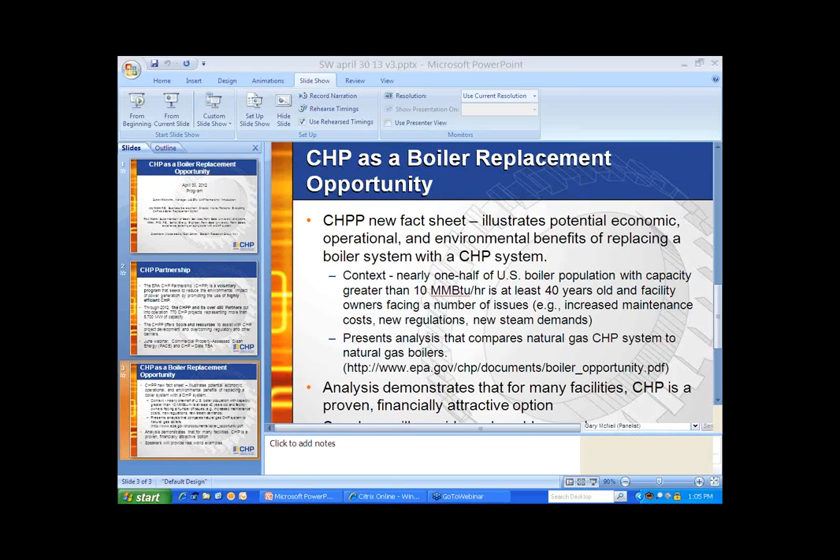Hello everyone, and welcome to the CHP Partnership webinar on CHP as a boiler replacement opportunity. It's my pleasure to welcome you today, and we have a number of really expert speakers that will share their experiences with you, and hopefully you'll have a lot of questions for them, and so we'll use that time at the end to cover that.

So let me just do a brief round of introductions. Our first speaker will be Jay Weist, who's a professional engineer and business development director at Worley-Parsons, and he will bring the project development perspective. And then we have some facility operators joining us from Penn State University, Paul Moser, Superintendent of Steam Services, and Laura Miller, who's Senior Energy Engineer. They'll be sharing their experiences with two systems, one that's been put in and one that's in the works. And then we'll have a question and answer session moderated by Bob Seidner.

So first, a couple words of introduction. I think a lot of you are probably already familiar with the EPA CHP Partnership, but perhaps you're not as familiar with what we're doing lately. We are a voluntary program that focuses on promoting CHP as a highly efficient way to reduce the environmental impact of power generation. We have a lot of tools and resources to assist with project development, and we also target barriers, regulatory barriers, financial barriers, that sort of thing. Through the over 12 years of the program, we have 770 projects that we've helped. We have over 450 partners and quite a few megawatts of capacity that we have facilitated.

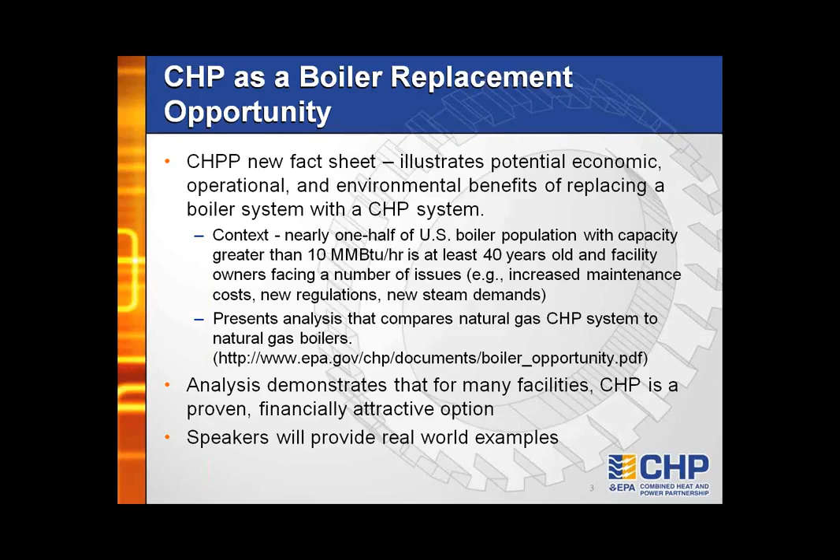Okay, thank you, Susan. This is Jay Weist at Worley-Parsons. As we go through the slides today, what I have laid out here as requested is an approach to evaluating CHP as a boiler replacement option, most likely from a project developer perspective and looking at the options. And then from there, we'll close out, and I have a case study or two that we could get through and show you a real-life example of what the opportunity is and how to evaluate this. If you could go to the next slide, Sarah.

First of all, Worley-Parsons, we are a project delivery organization for execution of projects, helping our clients develop projects and then deliver them from concept through completion. As you can see, we are a global company of about 40,000 people located around the world and operating primarily in the power, hydrocarbons, mining, metals, infrastructure, environment, and minerals and chemical sectors. Next slide, please.

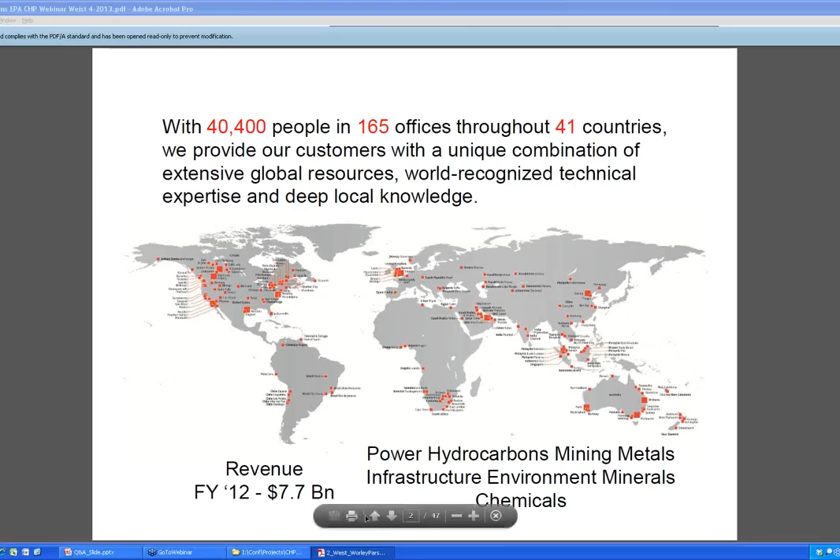A key consideration as you approach the CHP project and looking at any type of project delivery is to look at the concept all the way through to completion. And really, as far as what we see at WorleyParsons as a project delivery approach, is taking that blank sheet of paper, looking at what your options are, and then from a feasibility select consulting perspective, take the next

step, transition through a staged, gated process where you develop the project in both scope, concept, and details, along with the budget needs as far as determining capital and O&M operating budgets and developing pro formas for a bankable feasibility study and then actually building the facility and then operating and maintaining it. That project moves along a development cycle, as we call it here, project delivery and project development cycle, going from a consulting phase to a detailed engineering phase and through an own and operate phase and maintaining the facility.

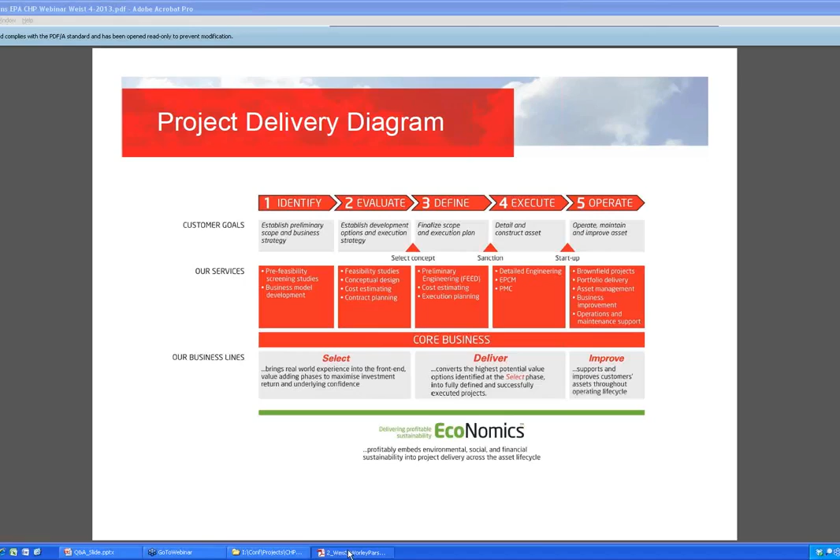And that's really the approach we take as we step through the process here for looking at, okay, if I wanted to consider what CHP options I had for my facility and what are my alternatives, when I'm looking at what was presented here from Susan as far as consideration of options when you're saying, okay, I have an existing facility, might be affected by Boiler MACT, and what are my options going forward. So as we go through this, keep that in mind. And if you go to the next slide, please, Sarah.

Why CHP, which is the question that you propose to yourself, and go to the next slide. And really what the value is here, and I know we're talking about boiler and gas-fired boiler options, but if you're looking at Boiler MACT, certainly the value proposition is, okay, do I want to continue at this point investing in my coal-fired plant operations and looking at retrofit air quality control to meet the Boiler MACT requirements, and the things associated with that is maybe higher O&M costs over existing operations, increased maintenance for existing equipment.

There's really no return on invested capital, risk of escalating coal costs, and you're still exposed to future regulations which might be incurred for continuing coal burning. An alternative to that is to look at, okay, what is my gas-fired CHP option? For one, you're going to have lower O&M costs, leverage CHP for producing electricity and supplementing plant load or sell excess power. You have a current market where natural gas pricing, at least in the near-term horizon, seems somewhat stable. And then you have a possible higher return on investment and lower O&M costs through external electricity sales and improved plant profitability. Go to the next slide.

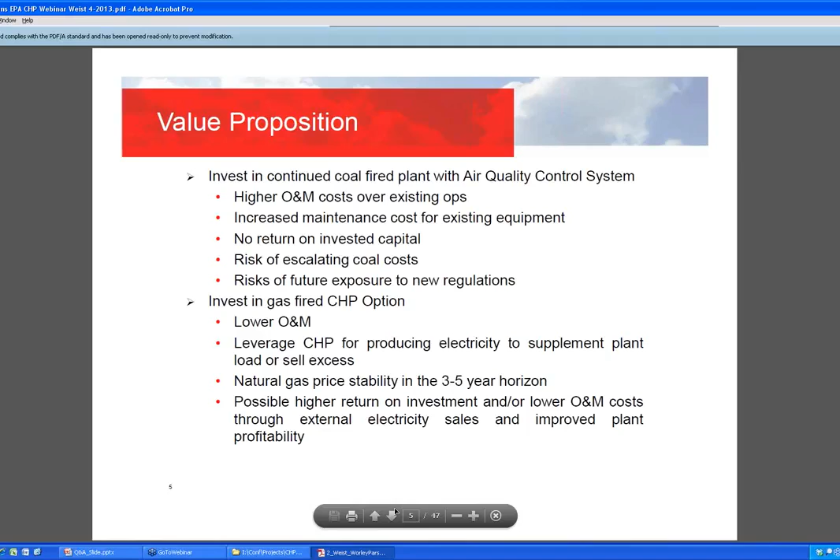And as you get into this, and these are developing issues that are just gaining traction in the industry, there are other things to consider, and they're well covered in the CHP as Boiler Replacement Opportunity fact sheet that was just issued by the EPA. These are things that you have to consider as additional value, as far as risk mitigation techniques and planning for future operation, where you look at your ongoing existing operations, and it might align with current corporate sustainability compliance implementation plans by looking at CHP versus existing coal, or even gas-fired package boilers. Are there site expansion needs for increasing steam demands?

You have economic and operational benefits in consideration of this, where certainly an issue that is gaining traction is enabling system resiliency in energy infrastructure, and this is really considering island mode operations. It's gained a lot of notoriety with some of the recent weather events in the Northeast, either snow or hurricanes, where there's been extended outages from the regions, and maintaining continued operations and, for industrials, avoiding shutdown startup costs for unplanned outages.

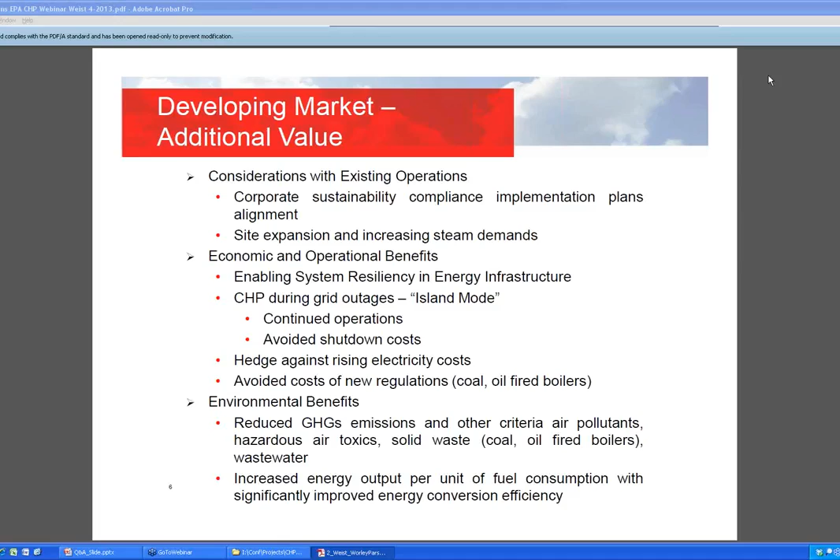And as you get into those facilities which are institutional types with hospitals or nursing care or universities where there might be more critical benefits as critical infrastructure, there are those too that provide island mode operation during those long-term extended outages. Other operational and economic benefits are hedging against rising electricity costs, and we'll get into a little bit of why that is occurring. Avoiding costs of new regulations, again, where you might have increased regulations for coal and oil-fired boilers,

and then the environmental benefits, which is reduced greenhouse gas emissions and other criteria air pollutants, hazardous air toxics, solid waste associated with firing coal and oil where you have air quality equipment and normal waste streams, and even as recently as wastewater issues that might be coming up associated with coal burning. And then the other environmental benefit is just the increased efficiency, converting energy into thermal and power and doing it very efficiently through a CHP process. Next slide.

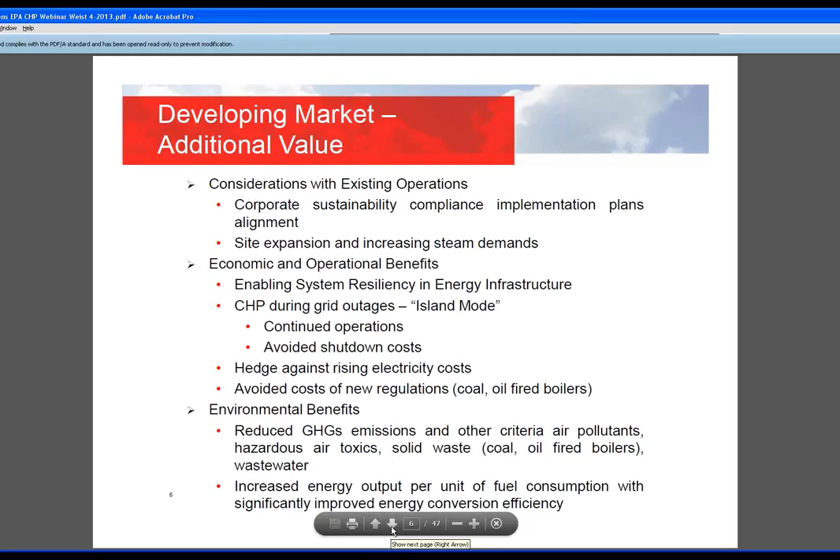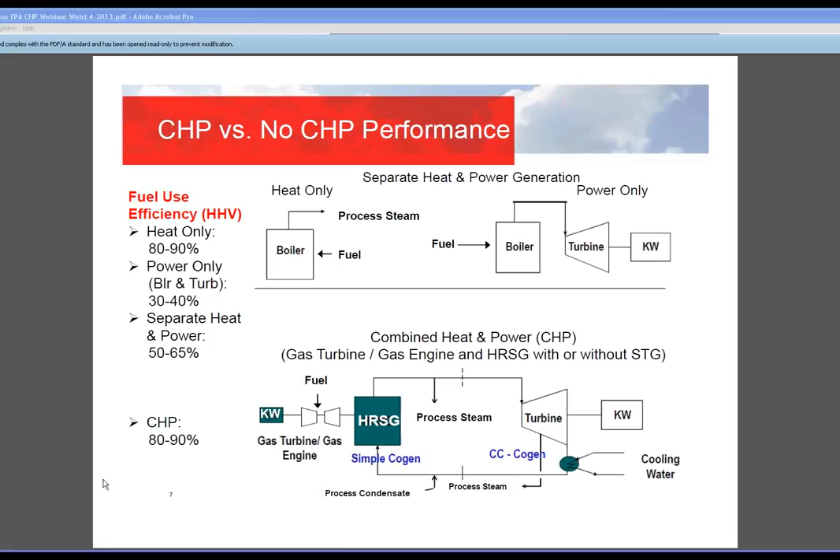And the way we've approached this is to say, okay, if you're going to do a quick screening analysis approach, if I want to understand what all my options are and be able to quickly assess and screen them down from multiple options, if it's 4, 5, 10, 15, 20, and get it down to 2 or 3 which are viable, this is an approach that you can actually take.

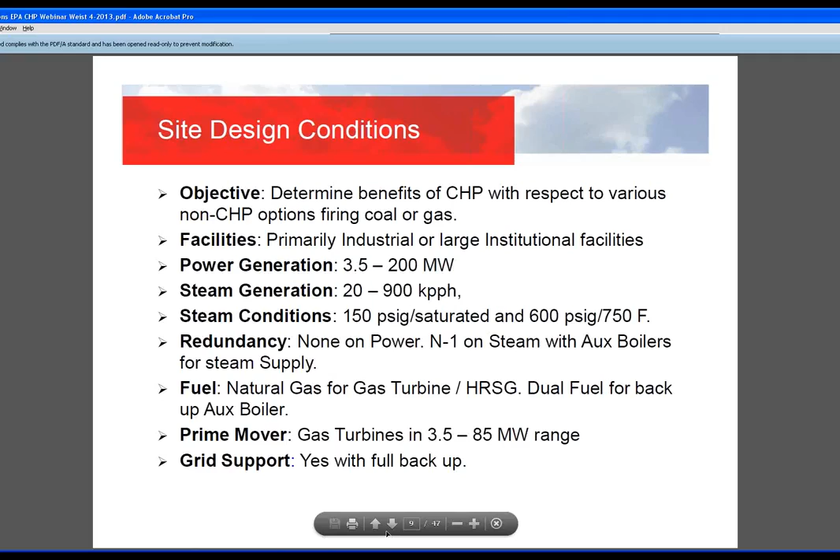And then looking at redundancy, as far as steam backup with aux boilers, and then for power, assuming that the power supply could be backed up from the grid. Looking at fuel supply, natural gas being available for gas turbines and the heat recovery steam generator, and for reliable supply, in case there would be a loss of gas, you could have an aux boiler dual fuel fired, oil and gas. Then the prime mover selection, and using grid backup. Next slide.

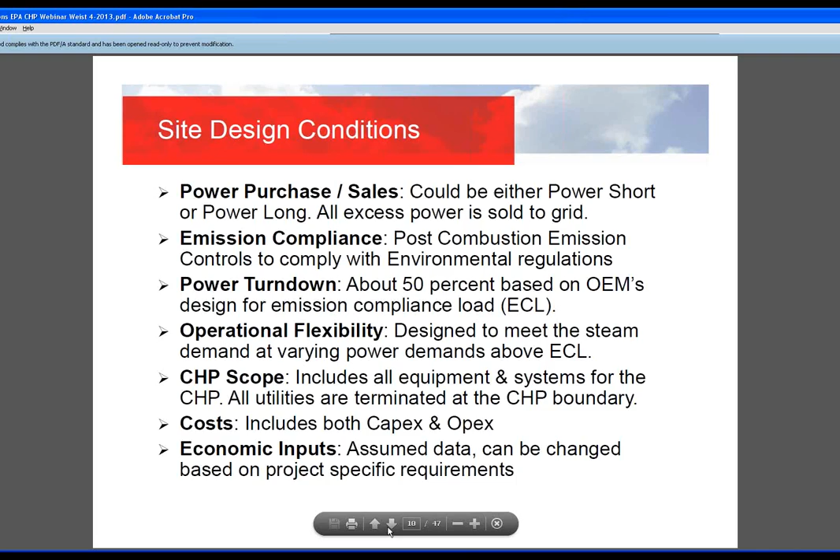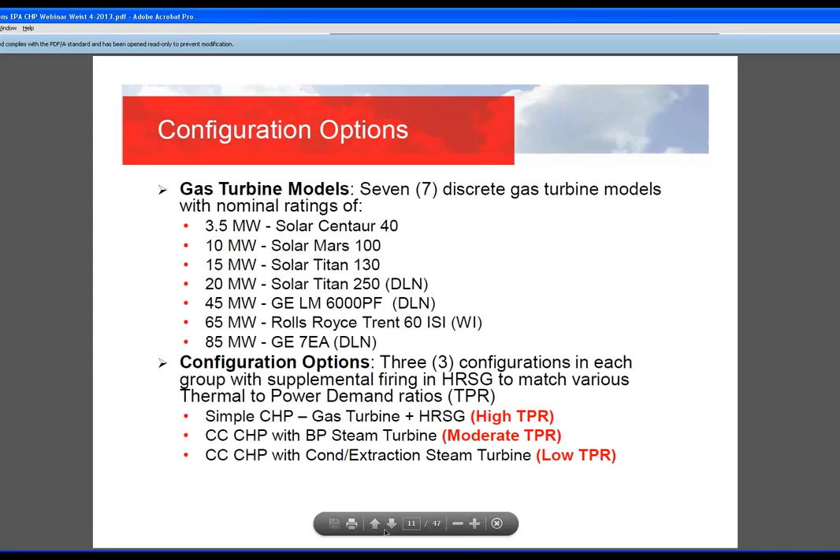If you're considering CHP and you have a high thermal to power ratio, you want to look at simple CHP with a gas turbine and HRSG. You have a combined cycle CHP with a back pressure steam turbine. And if you are high in power consumption versus your thermal, you always have the combined cycle with the condensing extraction steam turbine option. Next slide.

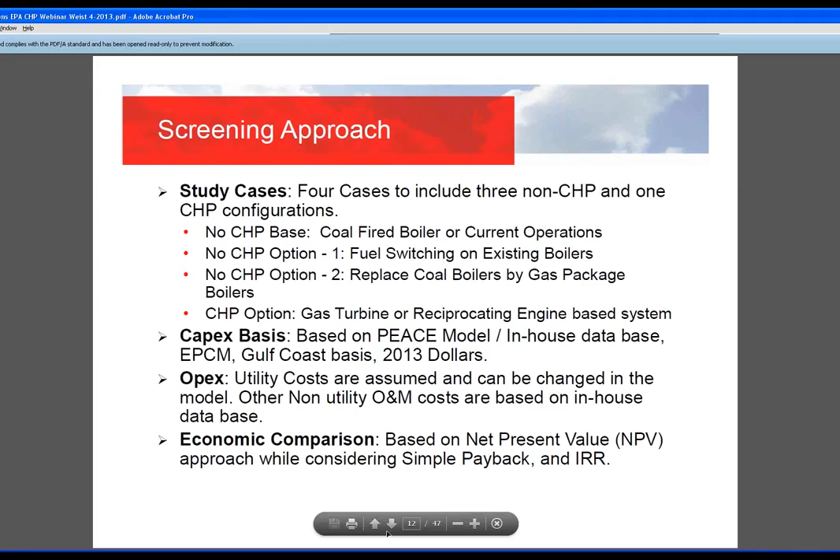So the approach is to look at your current operations and, going forward, what are the costs associated with that. Another option that is considered today is fuel switching, which is gas burners on a coal boiler. A third option is just putting in gas-fired package boilers. And finally, what we consider an envelope of CHP options is using a gas turbine or a reciprocating engine-based system and looking at alternatives. Coming up with capital and operating costs, and then doing a net present value, simple payback, and IRR. Next slide.

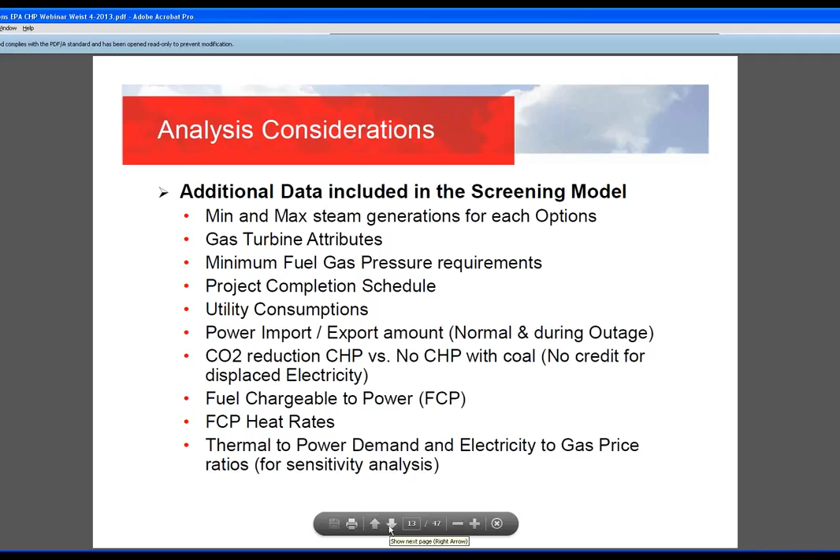Certainly our approach is fuel chargeable to power, which is a traditional CHP evaluation approach on how you value what incremental fuel is needed for heat rate and also for calculation of generating your own electricity. And then finally, thermal to power demand ratio and the electricity price to gas ratios.

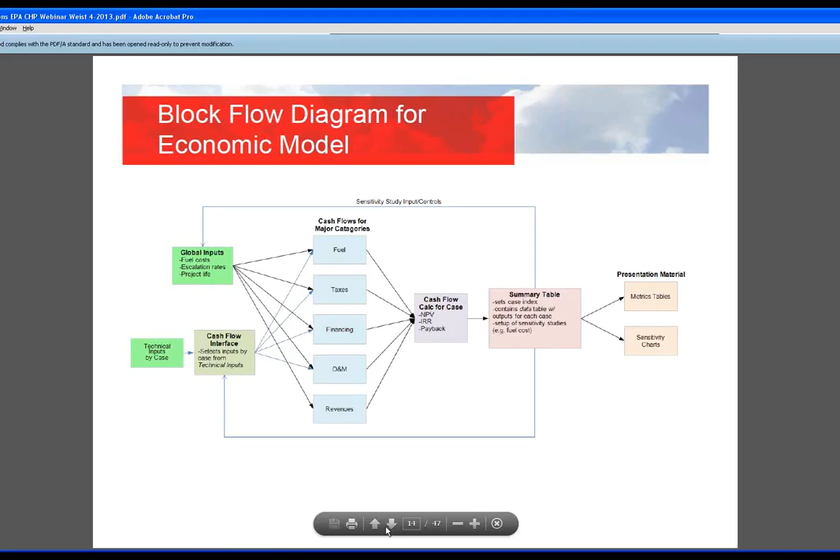And then running it through an economic model. Developing, you have a CapEx, you have a construction schedule, and you run it through an economic cash flow model and continue from there in developing the NPV.

And these are some of the benefits that we've found in general. Every site's going to be unique, but we have generally seen 40 to 60% energy savings. With an FCP heat rate basis, we've looked at systems at heat rates of 3,800 BTUs per kilowatt hour because of the design requirements. The one thing to be straight on is that when you look at the capital budget for a CHP versus package boilers or retrofit air quality, it will be higher, order of magnitude higher in the estimate. But the offsetting benefit is the lower operating and maintenance costs and fuel costs, so you're evaluating that against the higher capital.

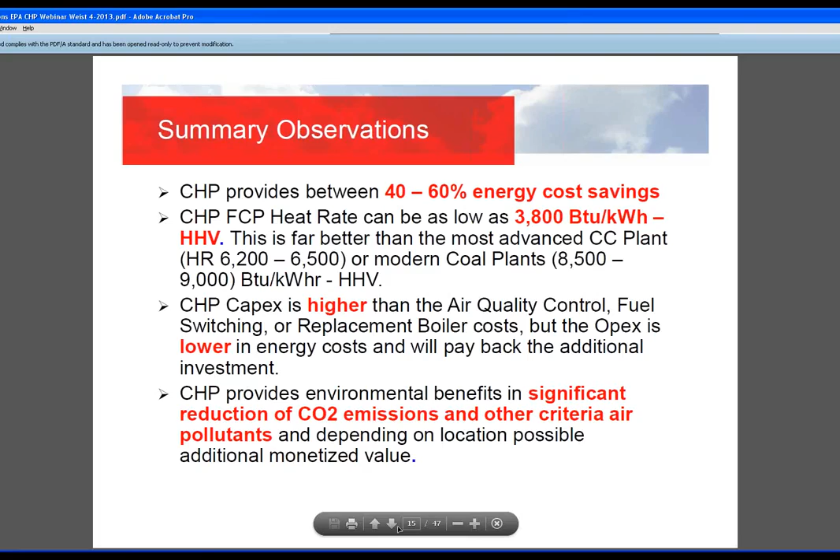Let's go on to the next slide. I just want to run through a quick case study which shows these results.

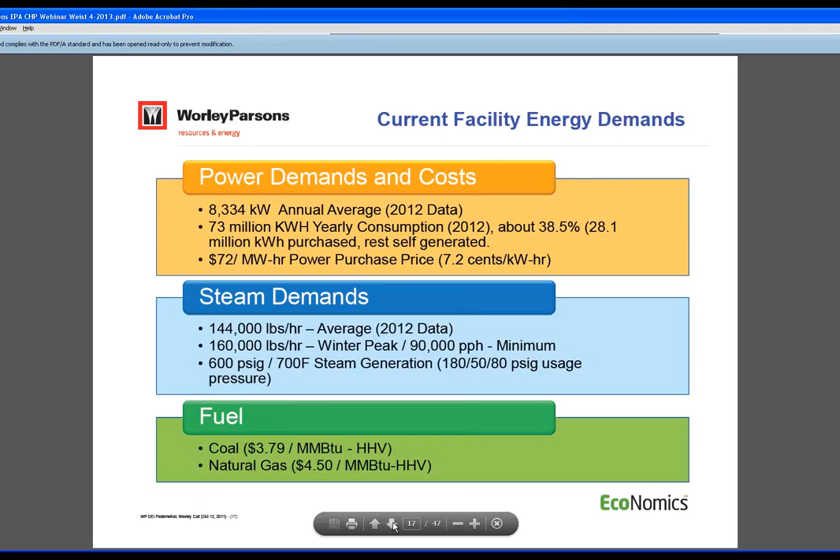This is for an 8 megawatt CHP at a facility, and you can see the requirements here as far as their current power price, the amount of electricity they consume, what their steam demands were -- and I emphasize were -- at 144,000 pounds an hour with their coal-fired plant, and then looking at their coal pricing and natural gas pricing available at $3.79 and $4.50.

Really the options here were a new package boiler with back pressure steam turbine. We evaluated Centaur 50, 70, and 100 as far as the benefits, looking at those producing both the power requirements for the site and thermal requirements.

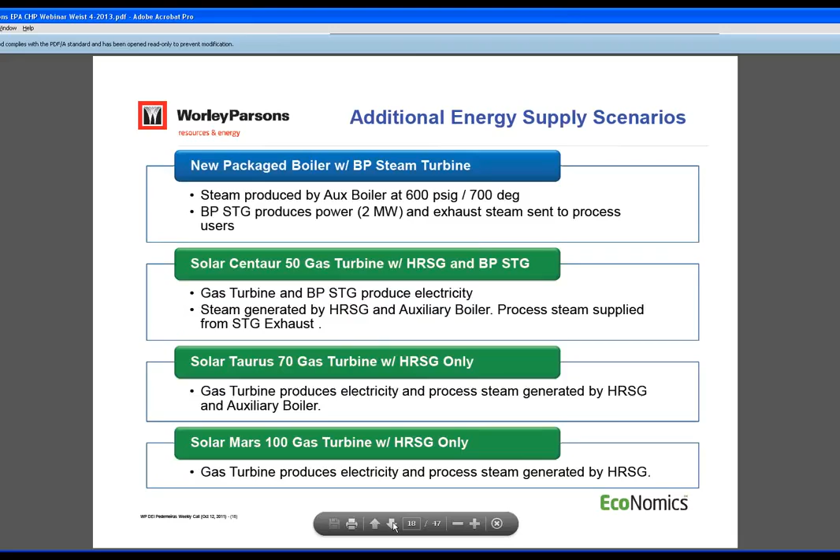Here you can see with both the Centaur 50 and 70, in those scenarios they weren't quite enough to meet the thermal requirements, so you'd have to run an aux boiler in the background. With the Mars 100, they're producing more power than they need, so they'd be exporting power. And then looking at an extreme case, they have the Titan 250, going from there.

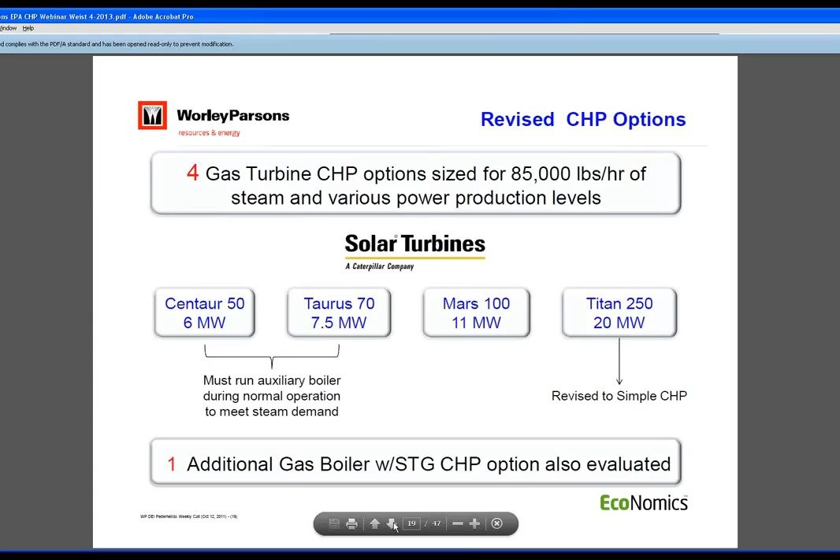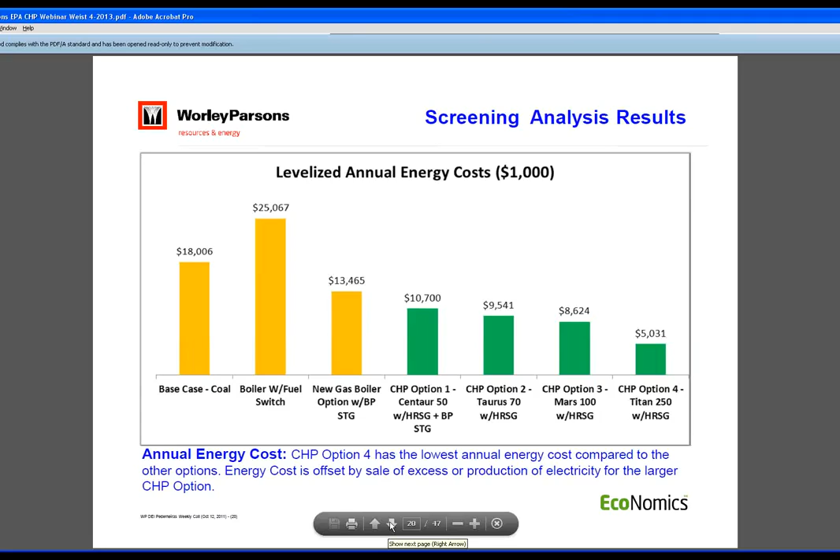This is really the true benefit -- looking at the levelized cost of energy, you can see the annual energy cost and what the savings are for spending the increased level of capital. Going from $25 million for just the fuel switching, which is the annual energy cost, to the highest end, which includes the net benefit from selling power to the grid, of between $5 and $8.5 million.

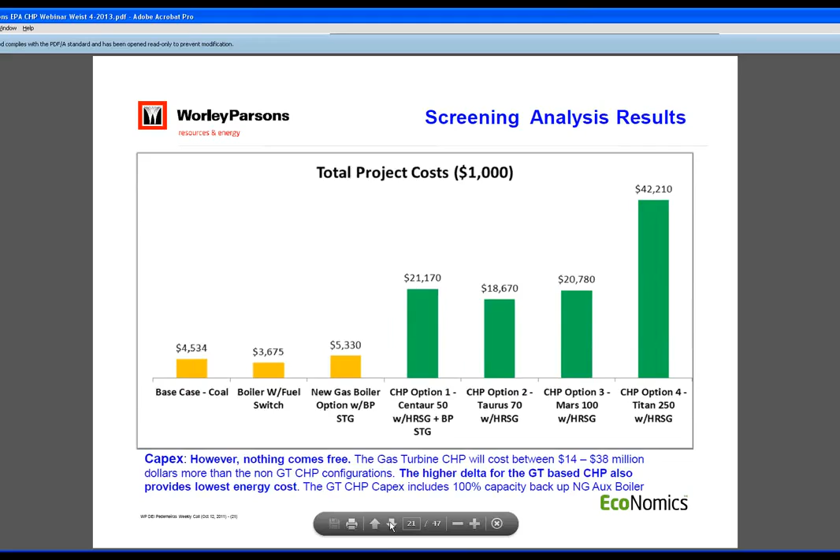Here, this is the total project cost, considering what you have to pay to install these systems. You can see to the left the simple solutions of retrofitting the coal or boiler fuel switching, or just putting in package boilers, against some of the incremental costs of looking at incremental CHP options of putting in the combustion turbines.

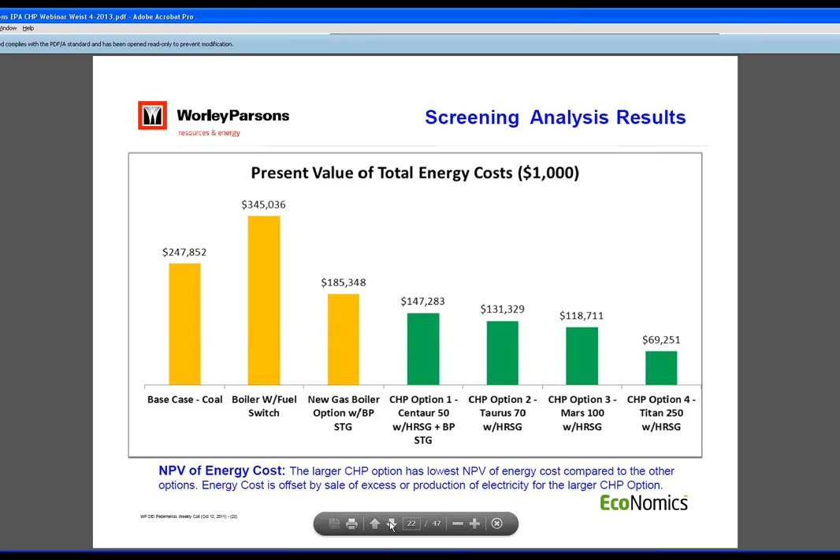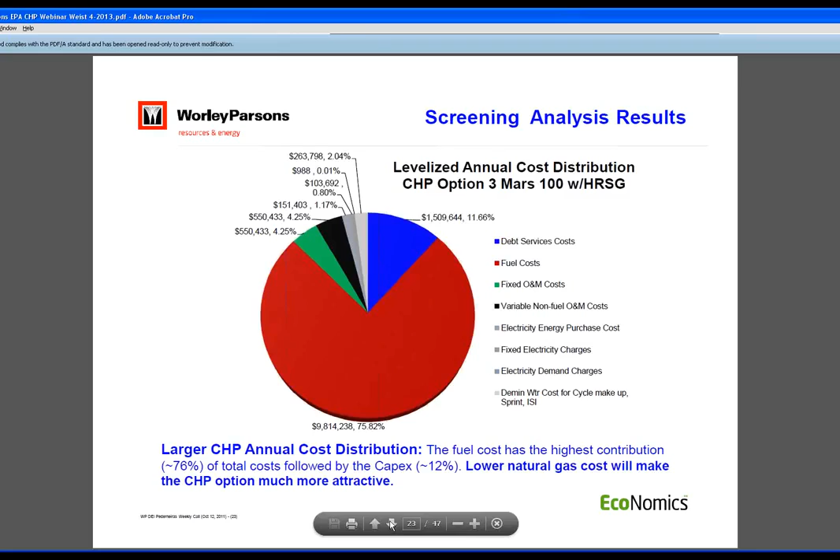This is the breakdown of the annualized costs as you consider debt coverage, energy bill, and all the other operation of the facility.

And this here shows you the incremental CO2 reduction and the benefits that you have from that, as far as increasing your power output and thermal requirements -- the efficiency of conversion is that you're actually saving CO2, not just from your own facility, but also what you're displacing from what's being generated from the local grid connection.

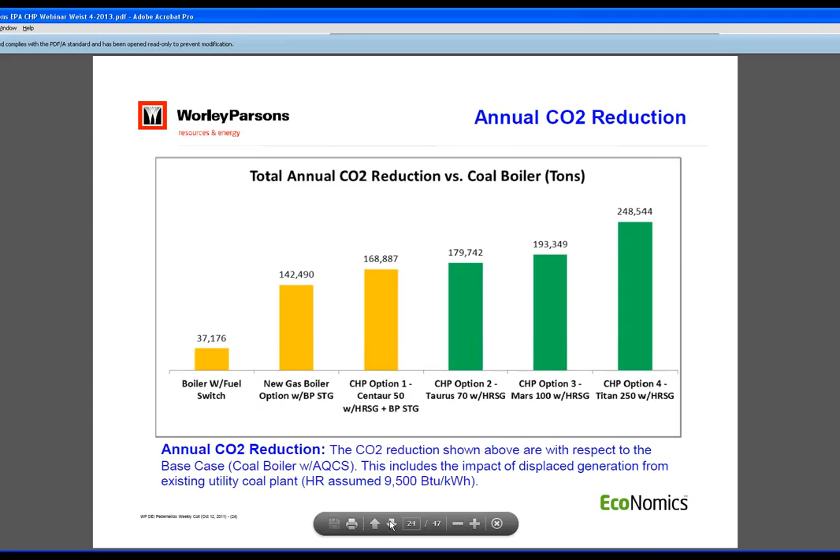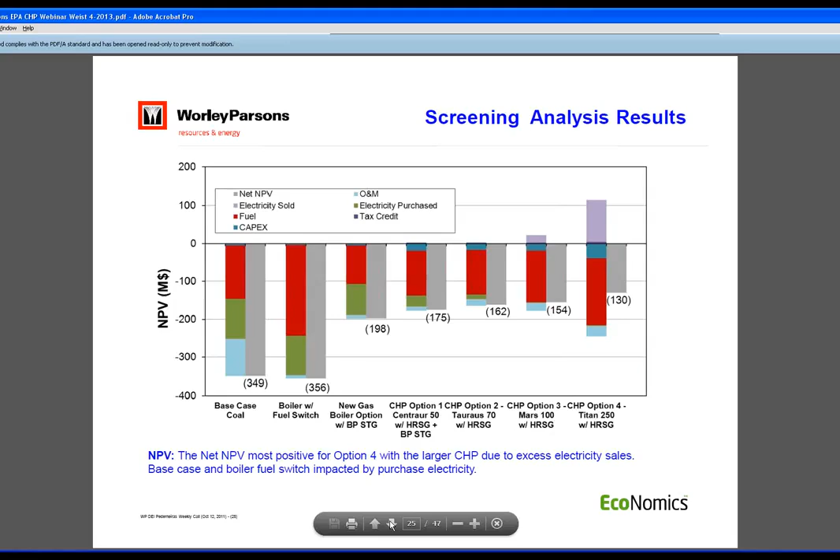This is what you would see in an NPV analysis, looking at the breakdown of what contributes to the net NPV. Above the bar on the left side, that's indicating the revenue benefit from selling the excess electricity to the local grid, giving you a net NPV on the right side of each bar, which might be less than the additional costs.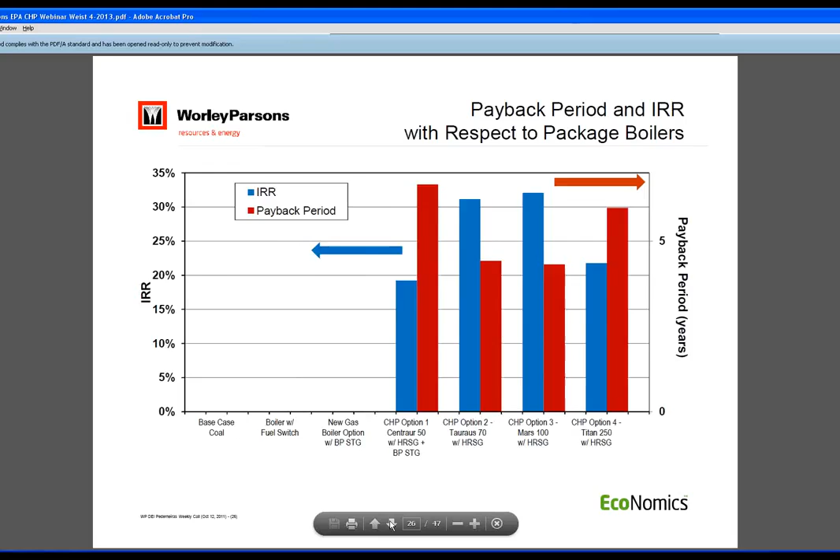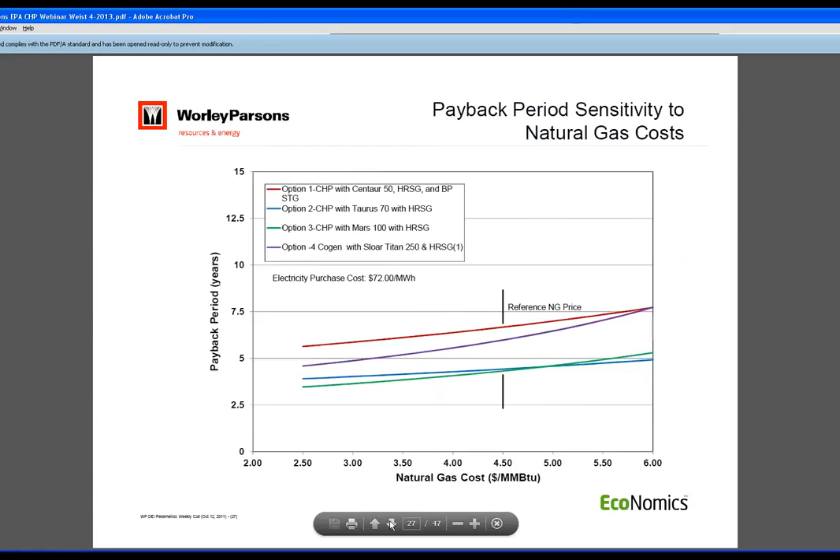Next, some sensitivities for these options: what's the variability of gas pricing, and how does that affect my payback? Next is the sensitivity to the local electricity purchase price and how that affects the payback of the project.

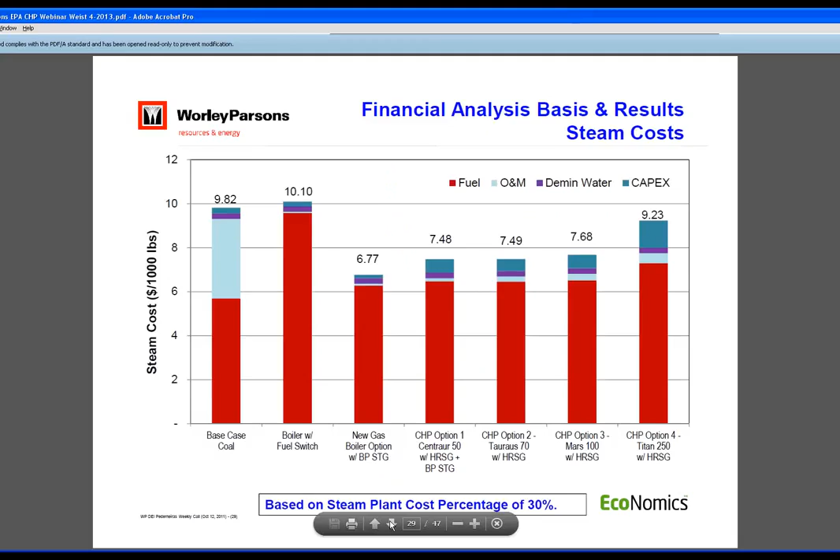Another thing you can calculate as you approach CHP is the cost of steam produced, just allocating the capital and the O&M budget. You can see your steam required as far as the cost per 1,000 pounds.

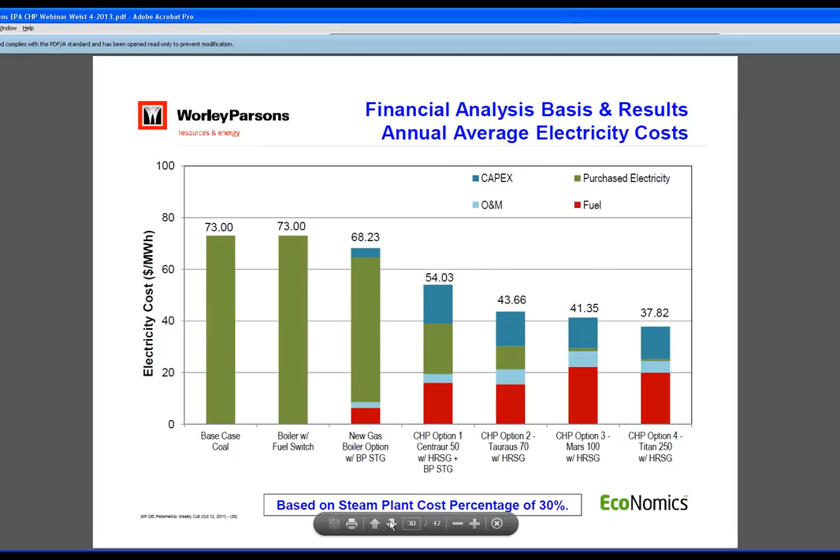If we fix the steam costs at the current cost of steam production, you can see what the normalized cost of electricity production would be, compared to fixing the steam cost versus calculating it.

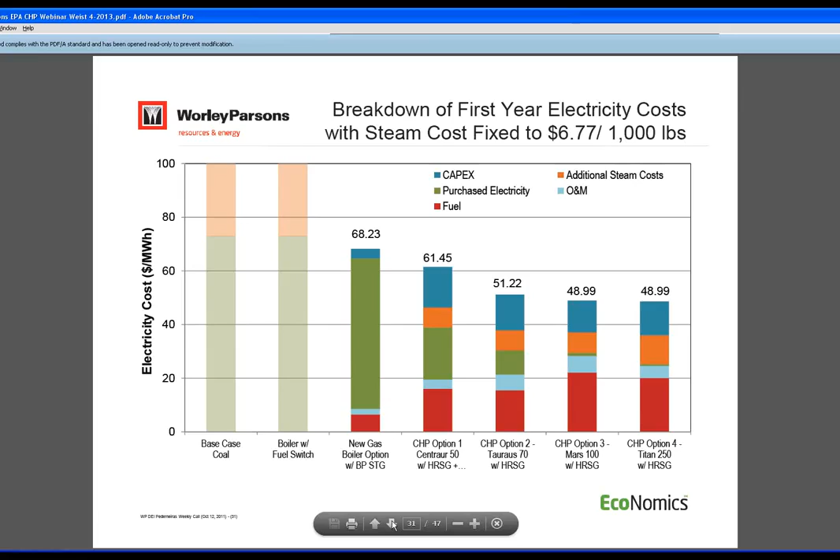So that's the case study. As part of the presentation, I do have a second case study available, but as time is limited today, we'll be moving on to the next presenter, which is Paul Moser and Laura Miller at Penn State.

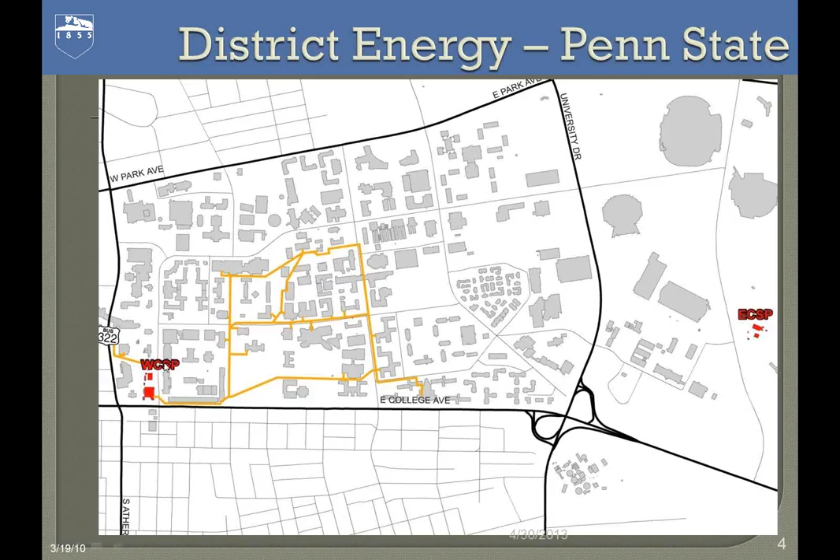West Campus Steam Plant, the coal-fired power plant here at Penn State. We don't use steam for chilling at all on campus, so we don't really have a chilling load in the summer. Here's a picture of where the West Campus Steam Plant is located, right in the middle of State College, at the corner of Burrowes Street and College Avenue. Again, that's a coal-fired power plant.

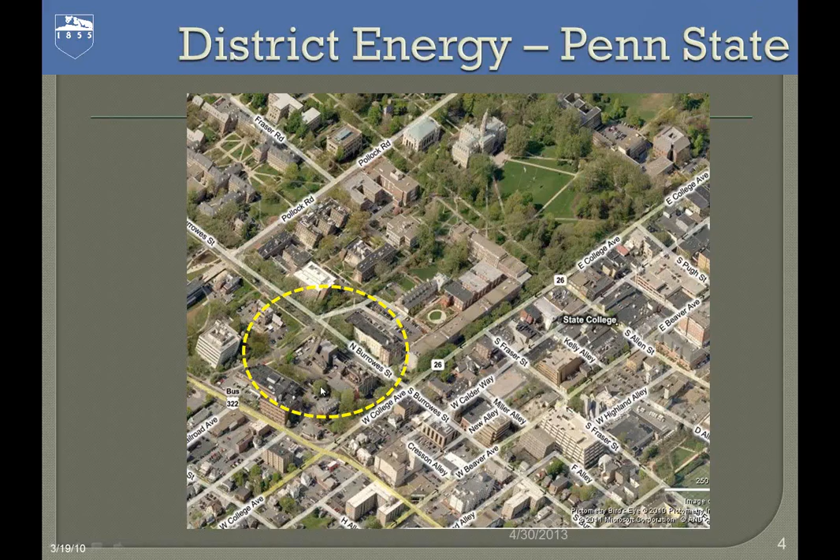And the East Campus Steam Plant, located a little bit further out, you can see it here. It has 2 packaged boilers, 100,000 pounds an hour each. They're natural gas fired with fuel oil number 2 as a backup.

So the energy picture in 2006: we needed additional capacity. Our peak steam demand in the wintertime was approaching our N-1 capacity, so we were seeing increasing steam demands each year. That was a big one.

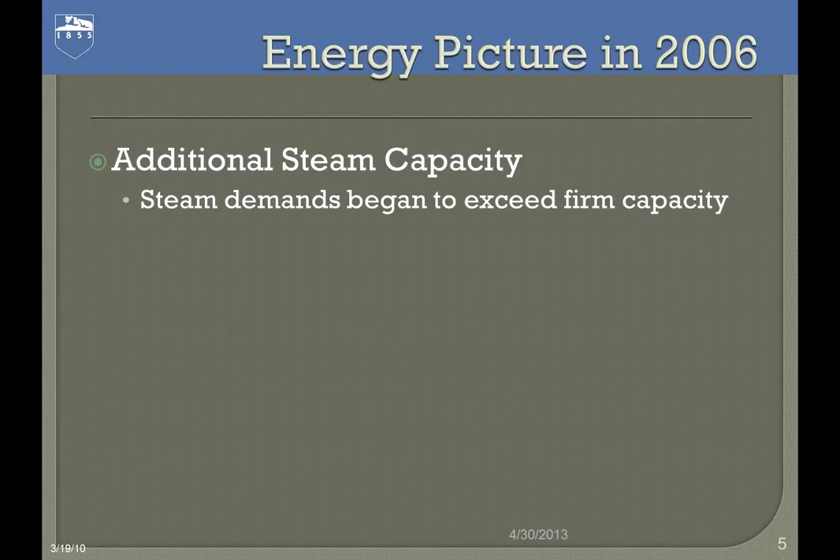We had an aging infrastructure. The East Campus Steam Plant, built in 1971, was the last major upgrade to the steam system, about 40 years ago, despite campus growth. So we went 40 years without a major upgrade to our steam generation system.

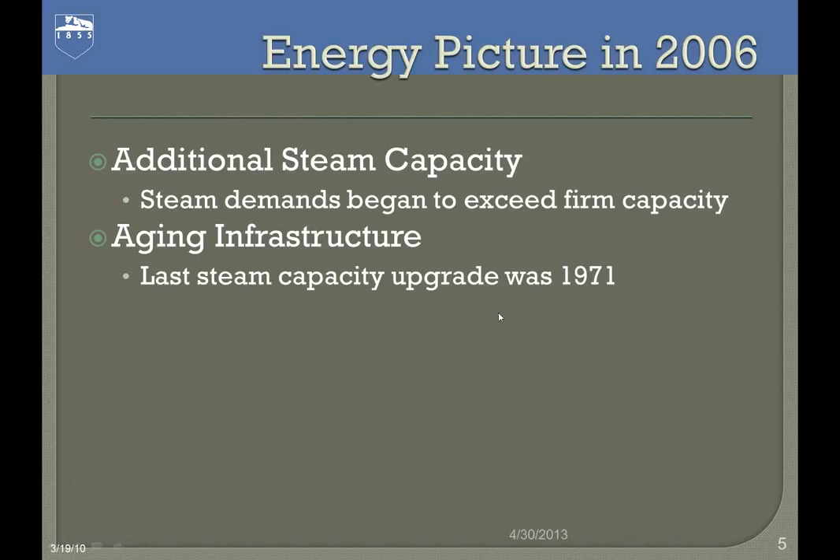Essential services also mattered. This was shortly after the Katrina event and others, and a lot of us in our field started asking ourselves if we were prepared, and found that our answer really was no. So this was how we defined it: how and where would we care for about 10,000 people on campus should we have a total loss of power? Something we hadn't experienced, but we'd seen others of our friends in the Northeast experience total loss of power. We felt we needed about 12 megawatts on site to meet essential services.

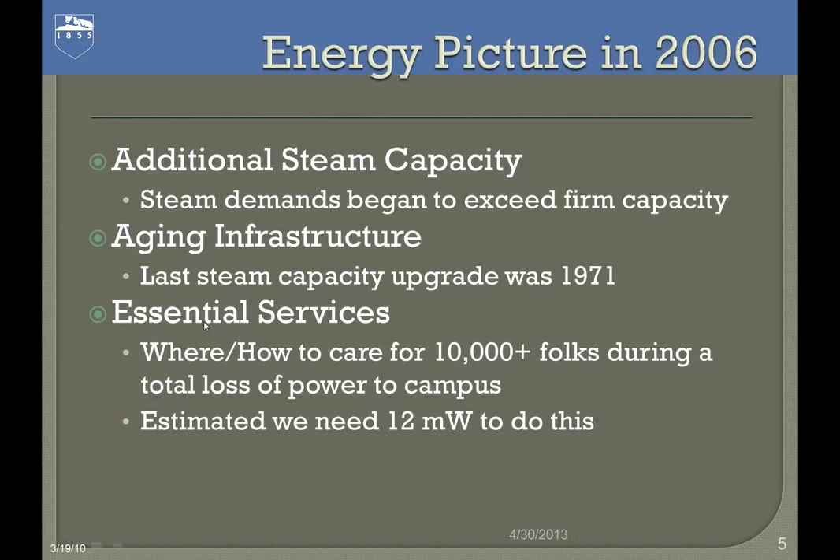So we were looking for a way to solve those problems. Why did we pick CHP? We felt it solved the energy picture I just described, and we also felt it was a better commitment to energy efficiency. Instead of boilers and emergency generator sets, specifically EG sets, having a CT running all the time would prove it would be available when we needed it. We've been going with that philosophy since.

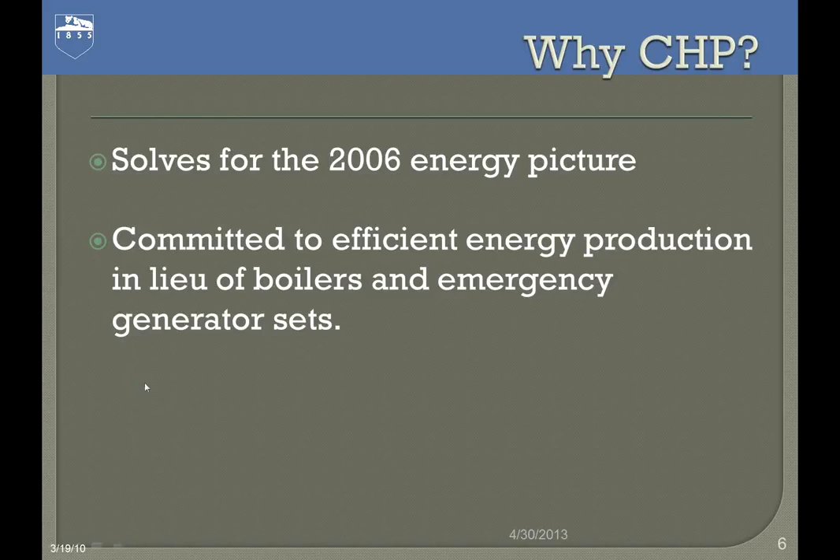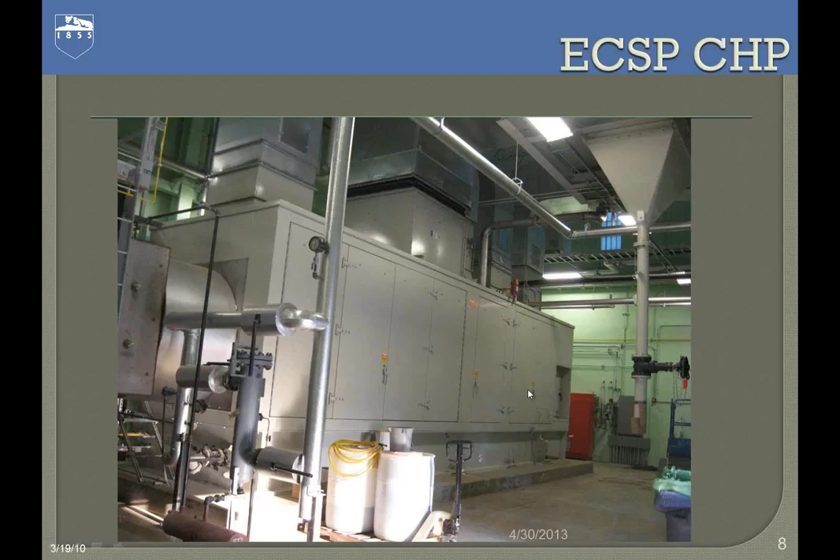And it's connected to a Rentech boiler rated at 117,000 pounds an hour, saturated conditions, 220 psi, delivering the campus somewhere around 140 or 150 psi, whatever the campus high pressure steam demands are.

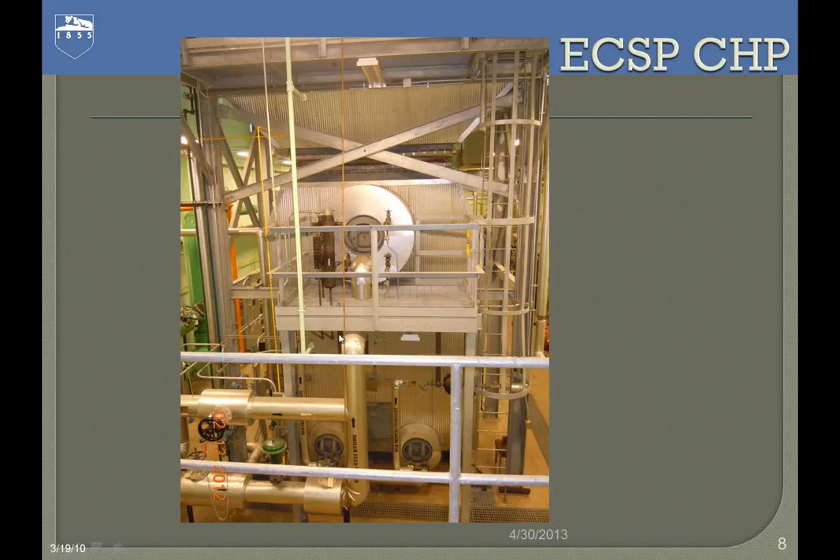So just a little view of what the cycle looks like. Down here is our combustion turbine with natural gas or oil added. We're going to run this on gas under all conditions, oil is really just strictly a backup. It's nominally rated at 7 megawatts, will make a little over 8 megawatts on a cold winter day, and just under 6 megawatts on a hot summer day.

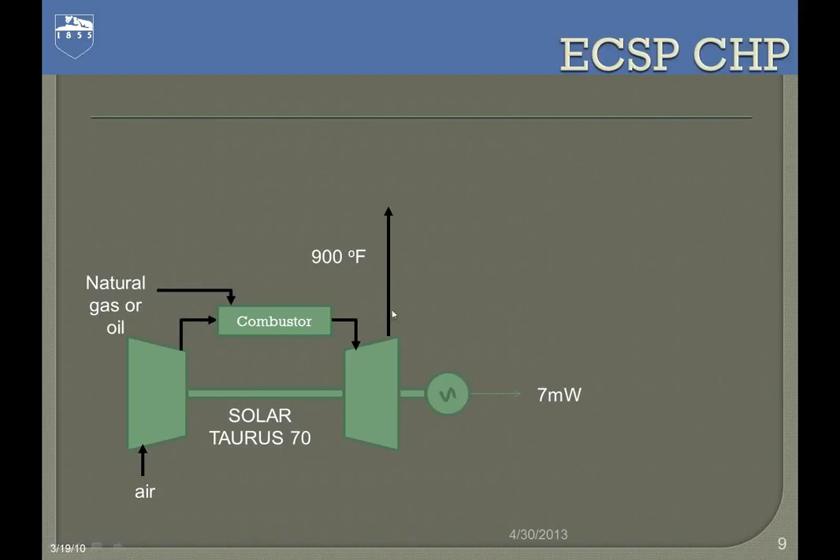Its exhaust temperature at 900 degrees is feeding a boiler, producing steam without any duct firing at 32,000 pounds per hour. We can add duct firing, which we're doing almost all the time, bringing that up to a total of 117,000 pounds per hour. On a cold winter day here at the East Campus plant, this unit's usually running at 100,000+ pounds an hour - that's where we try to keep it at a minimum, though we'll run it above that.

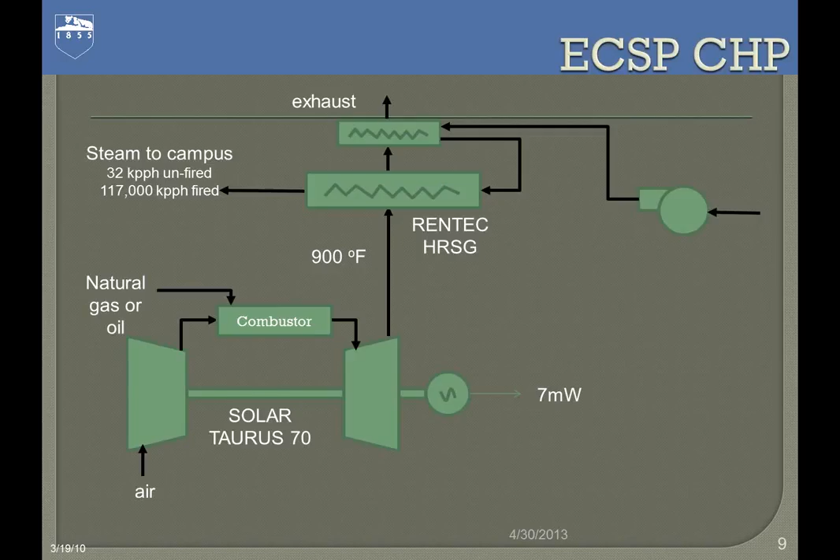Okay. So just some project costs. The CT was close to $4 million. The HRSG was $1.4 million. And in order to fit this into the existing plant, we had to build up the balance of plant. So the plant was designed for the units that were there, not the units that aren't there.

So we added feed water capacity, deaeration, a pump. We added water treatment in the way of softeners and reverse osmosis demineralizers, and really a full build out to accept this machine.

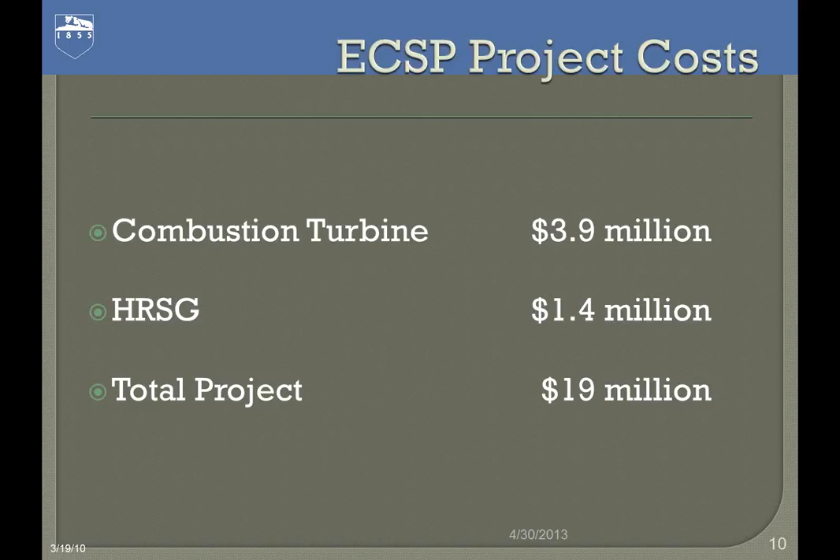We're using the Solar service agreement, and that means they're going to be in here twice a year, once in the spring, once in the fall. In fact, next week they'll be in here to do an out-of-service inspection, and in the winter and the summer we'll do an in-service inspection, and then we'll expect a complete overhaul after about 30,000 hours.

And these costs that you see below are the costs that you're basically investing so that you're prepared to go for the complete overhaul. And we have not had one yet, but when we do, we just expect that the engine will be removed and replaced with another engine, and we'll get going from there.

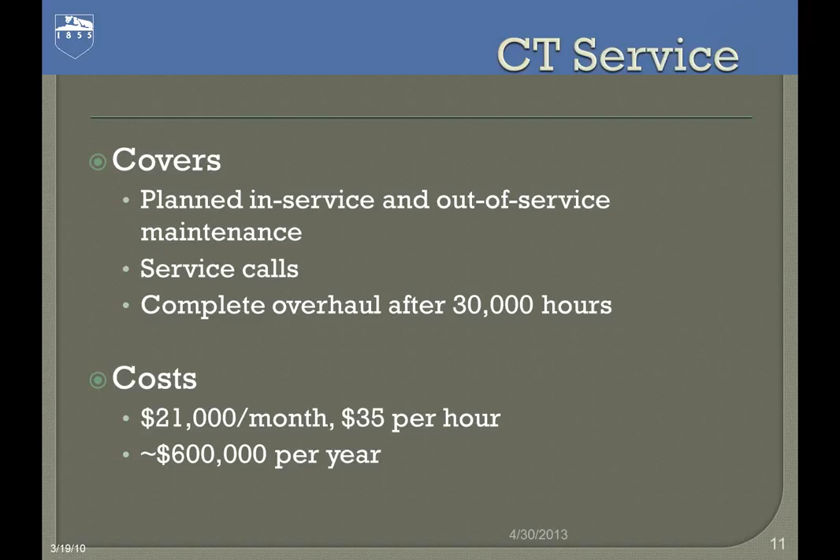So our projected electrical generation, a little bit on the electricity. Prior to putting in the CT, we were producing electricity here at the West Campus steam plant using steam turbines and producing back pressure steam to campus. So our electrical load always followed the steam load. In the summertime, we would make really just about 500 kilowatts of power. In the wintertime, we could make a little over 3 megawatts of power.

So prior to the CT, which this pie is showing, really we only made about 4% of the electricity that the campus demanded. Our typical hot summer day electrical demand for campus is 50 megawatts. Our cold winter day electrical is somewhere around 30 megawatts.

But this electrical generation that we do produce is 100% of our emergency power necessary to feed the buildings. That is for the emergency lighting, egress lighting to get out of a building in a total loss of power. So we can feed that from our emergency cable that is fed from the West Campus Steam Plant electrical generation.

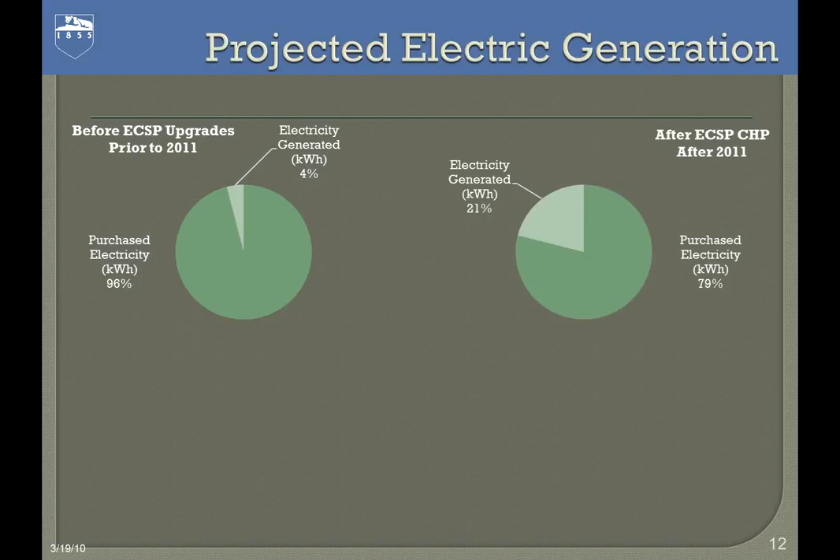As we go through and add this CT with the HRSG at East plant, then our electric generation is going to get a little more like 5-to-1 purchased to produced on site. And I've got another pie here that shows, and we'll tell you a little more about this, but there may be some room to put in another CHP. And should we go that direction, we think our electrical demands will look this way. We don't have enough heat load for us to produce all of our on-site power.

Our fuel mix, prior to the East Campus upgrade, we were a coal facility. Coal was dramatically less expensive. We had the infrastructure here at West to produce it. West plant came first. So the base load comes out of West, and East plant came later, and it was just the peaking plant. So East really, as you can see from here, made about 4 or 5% of the steam per year until we put this project together.

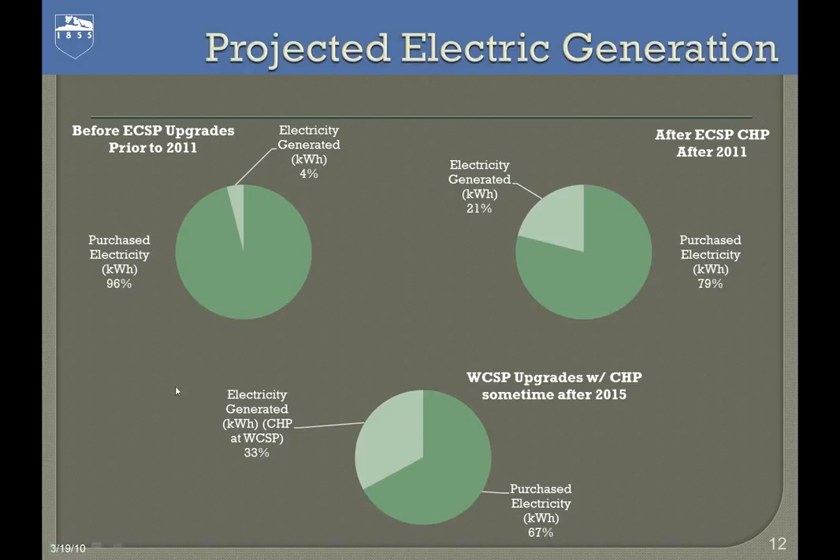And then it started to look a little bit more like, whoops, I went backwards. How about that?

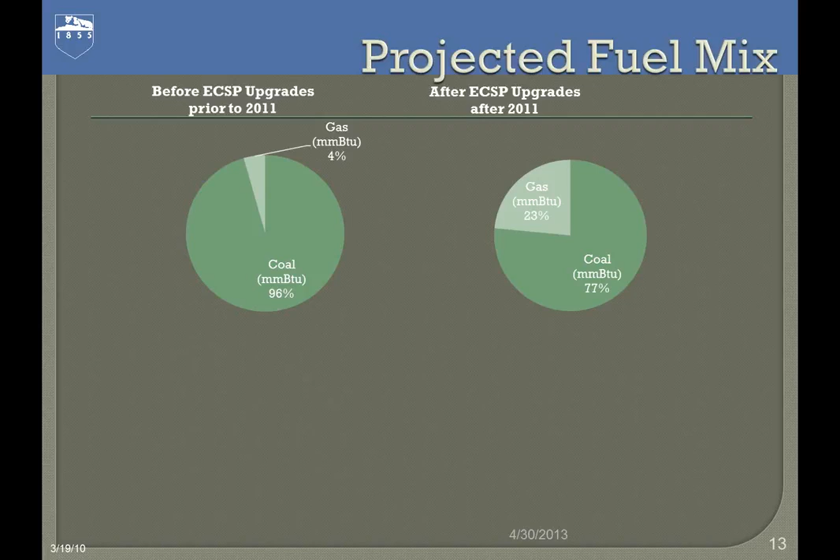As we added the East Campus, now your coal gas consumption starts to go over more towards gas. And as our gas prices really came down, again, we developed this project with high gas prices and low coal prices. As those gas prices came down and coal went up, we're burning gas as much as possible. We even have the capability to burn it here at West. As we go through our upgrades at West, which I'll tell you a little bit more about, we'll see our coal eventually go away towards 100% gas after 2015 boiler MACT upgrades.

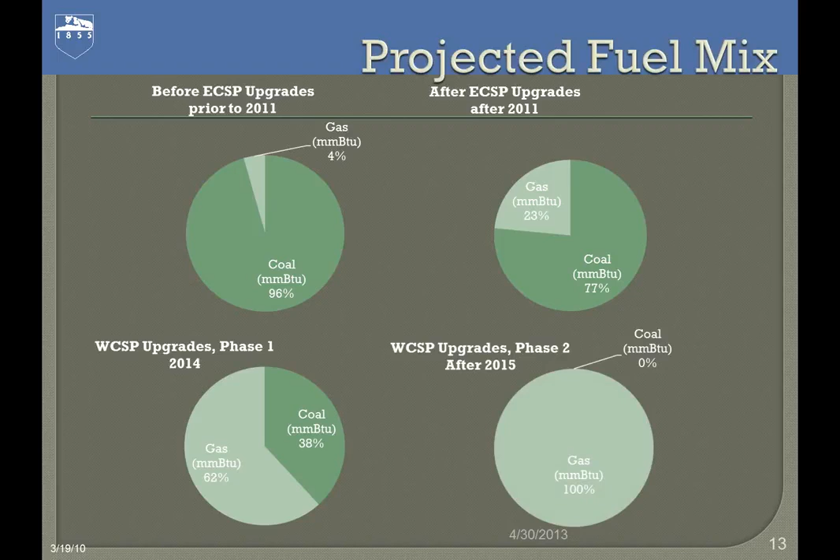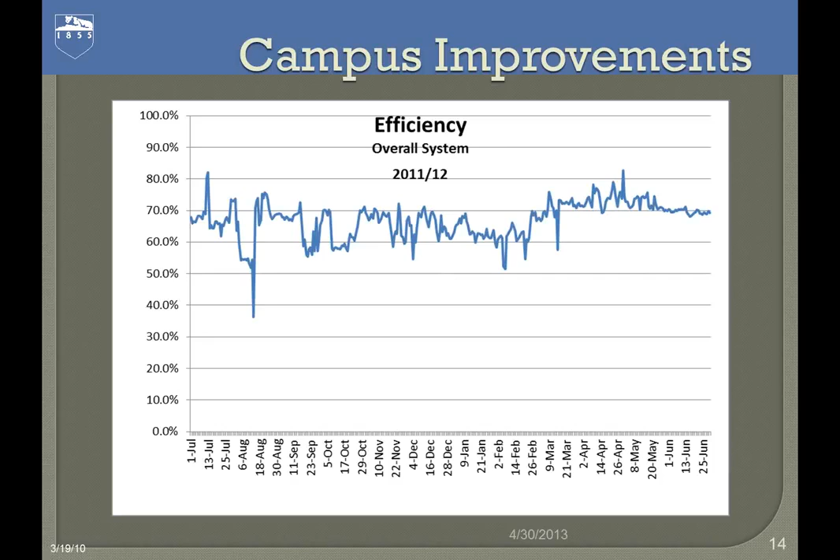Thank you. Okay. So as efficiency is important to Penn State, so is sustainability and greenhouse gas reduction.

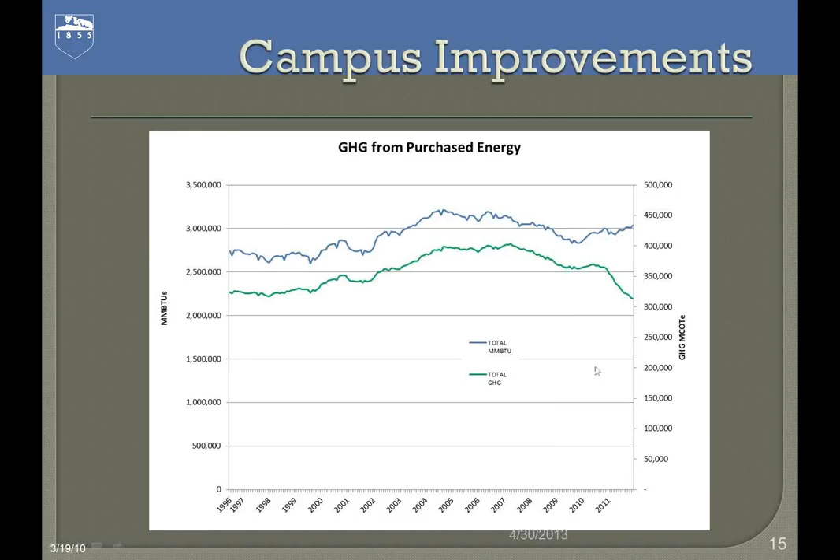So if you look at the top line, it is our energy consumption over the past several years. And you can see the green line, which is our greenhouse gases, tracked that energy consumption line for a very long time, and then we committed to, at first, a 17% reduction, and now unofficially we're looking at a 35% reduction. And as you see this wedge shape that occurs toward the end of the graph, this blue wedge shape, you'll start to see that more and more often.

The biggest reason behind that reduction is that when we put in the CT and we displaced anywhere between 30 to 100,000 pounds of steam with gas fuel versus coal fuel, we automatically saw a greenhouse gas reduction. But we also displaced millions and millions of kilowatt hours that we bought from the PJM grid. And if you're familiar with the Northeast, we are still over 50% coal on our PJM grid. So not only do we burn a cleaner fuel, but we also make our own cleaner electricity so that we're not contributing in that way to greenhouse gases.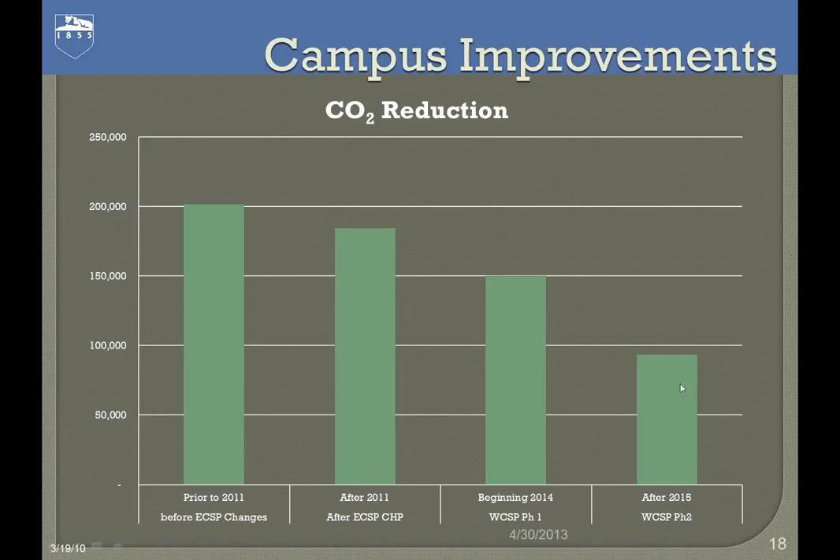So, this shows our CO2 reduction over time. So again, we're heading towards full natural gas operation, and this just gives you a reduction from basically a coal-fired 200,000 tons a year of CO2 down to a little under 100,000.

And our next step is here at West Campus, we have to comply with the Boiler MACT, and to do that, we will change from coal to natural gas, and as part of that, we're looking at a second CT HRSG. So if you remember, our low steam flow in the summer is about 80,000 pounds an hour, and unfired operating just with the CT is about 30,000, so it looks like a second CT fits our load profile.

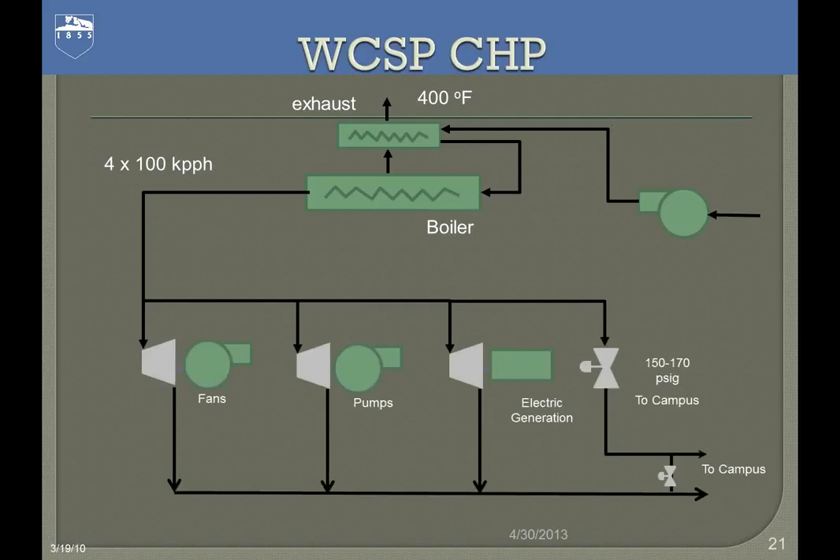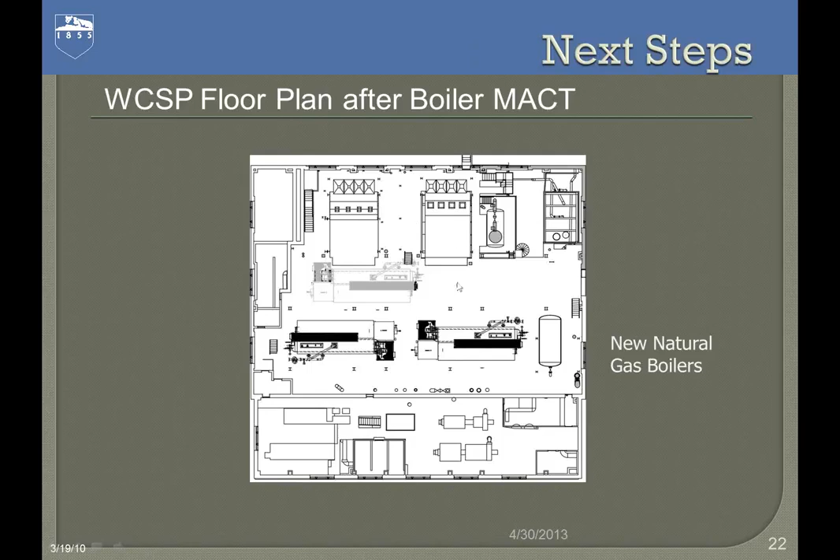And again, it would go in the West Campus steam plant, replacing 4 coal-fired boilers. Over here you'll see 2 package boilers when the MACT is done. And if the evaluation continues on and we can do it, we put a CT and HRSG combination there. And just quickly going through, this is our West Campus CHP, something we've been doing for a long time. And the layout of the West plant, so here's the Boiler MACT solution, 2 new package boilers, and keeping the old coal-fired boilers until we could one day find a way to put in a CT with a HRSG.

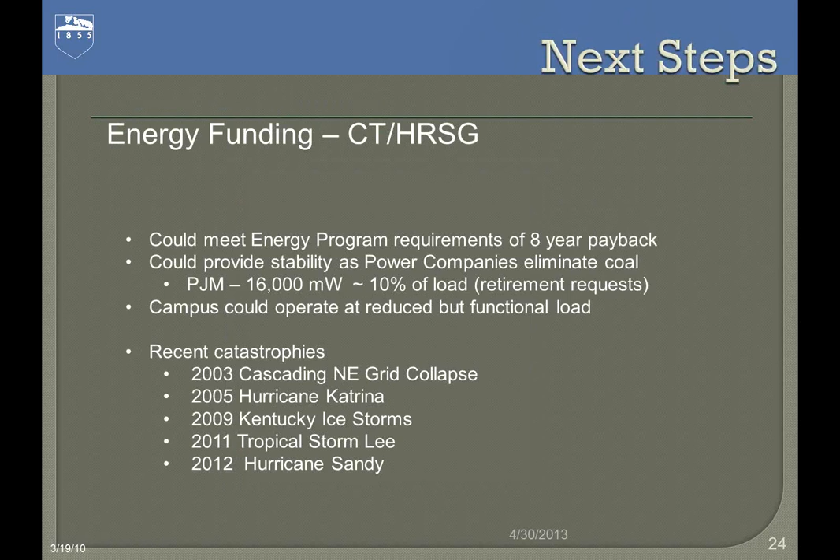And so the current program to convert our power plant from coal to natural gas does not include additional funding for a second CT HRSG. We're looking hard at that as being funded through our energy program. And again, Paul just told you what our costs were when we did the first CT. The first CT made sense. Now with the economics change, the second CT is starting to make sense. We have a $60 million budget that is primarily for building and utility energy improvements.

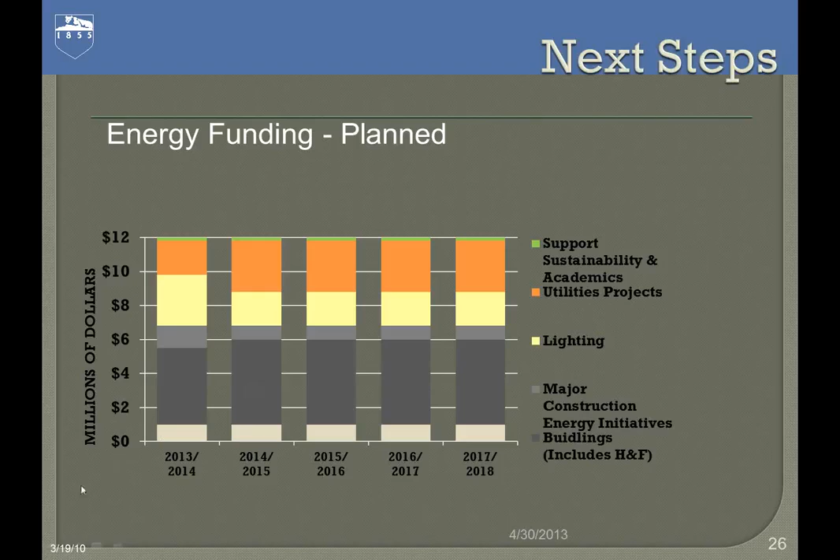This is what I had hoped it looked like. The next slide shows you if we decide to fund the CT HRSG from our energy program, that we do that at the expense of some building improvements. So this is where we are now. Does it make sense to save energy and operate efficiently with a new CT or make improvements in our buildings?

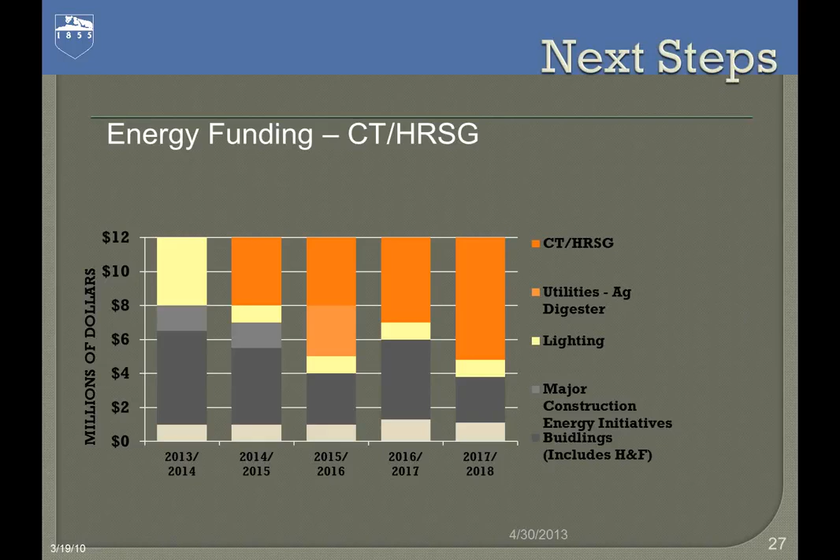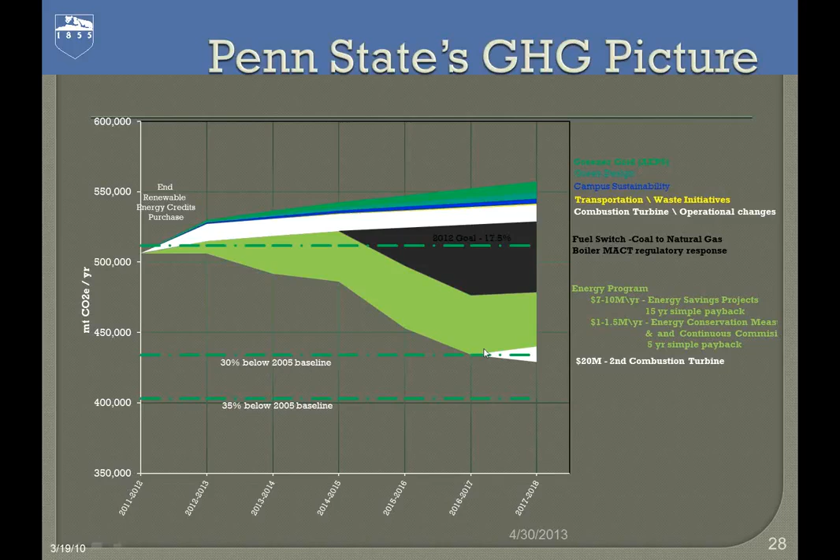The next slide. Again, that was our wedge. That white wedge at the very bottom would go away and actually fold up into the lime green, which is our building improvements, because it would be funded from that project. And then I believe we're finished.